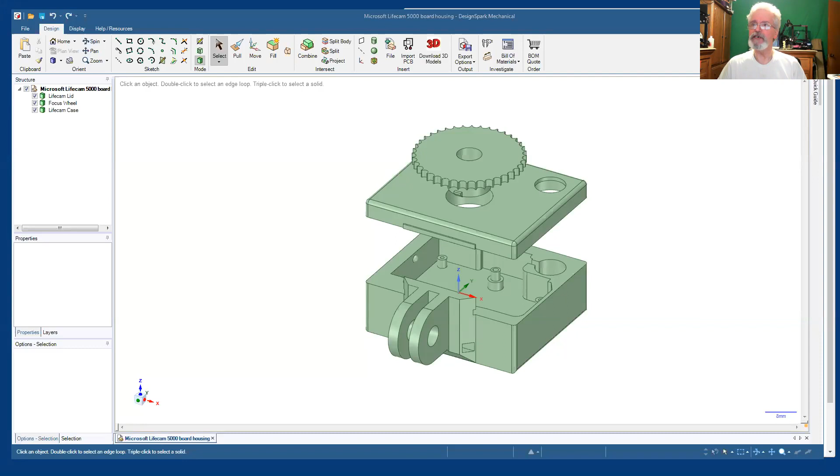So I'm going to share my display, and just for the heck of it, we're going to jump into Google Chrome here for a moment. Let me just move it over here so you can see it. And let's do a search for Microsoft VX-5000. And let's look at images.

So here you can see this is what the camera looks like. And the problem that I had was this mounting, this thing. It's intended to sit on a desk or maybe clip over the top of your display monitor, and it didn't lend itself well for doing what I wanted to do on my desktop with YouTube. So I decided to go ahead and take this case off and get rid of this silly mounting. And so I'm going to stop the share.

So I decided to do that and make a new case for the printed circuit board that's inside the camera, and allow me to be able to mount it on a tripod. And I figured probably the easiest way to go would be a GoPro mount, only because I don't know how to do screw threads in my design software yet. I just haven't figured that out yet.

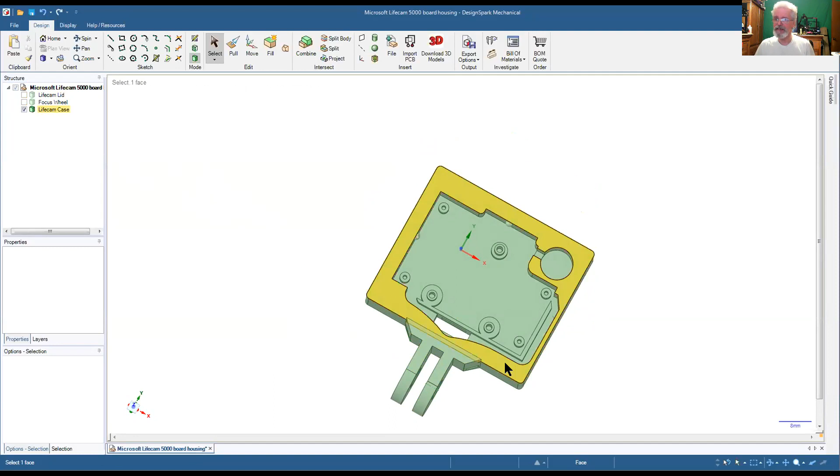So the very first thing I did was I created this case. Now, there were many iterations of this case. I didn't have the GoPro mount on it. I didn't have the channel for the cable that went up the side. I figured out the very first thing was the outline of the printed circuit board and a place to put the microphone, and then the screw holes in the corner to hold the board in place, and then the screw holes to hold the case together.

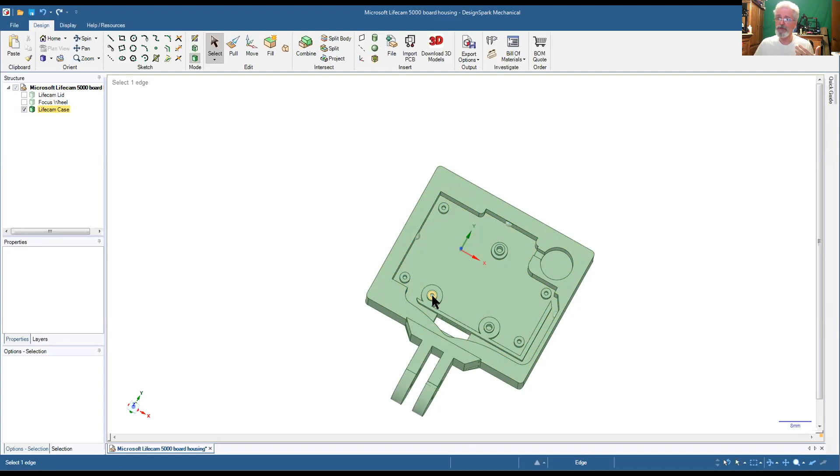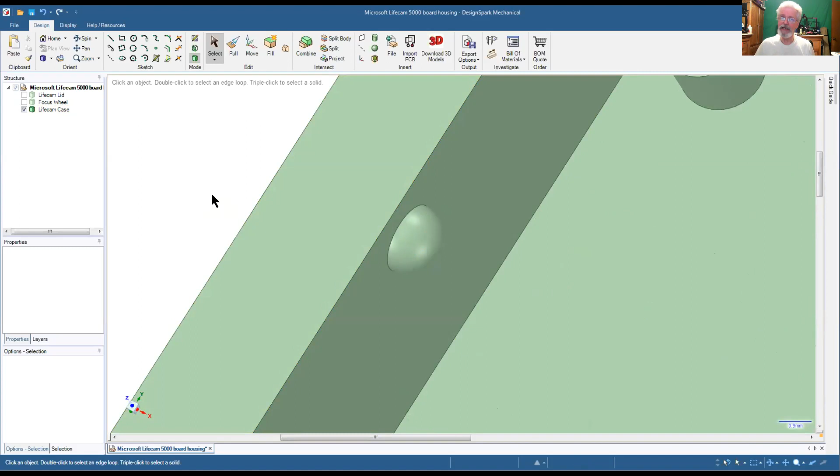Originally, I had planned on having a lid, and I was going to use the original screws to screw the thing together. But ultimately, what I ended up doing was I made these little dimples that poke into little holes on the top of the inside of the lid. So these are just spheres that I created. They're just 2mm spheres, and I embedded them in the side. And then I made a couple of 2mm holes in the top and put those in the places where the spheres would come out. So you just have to sit down and think about how you want to do some things. And so this is the case.

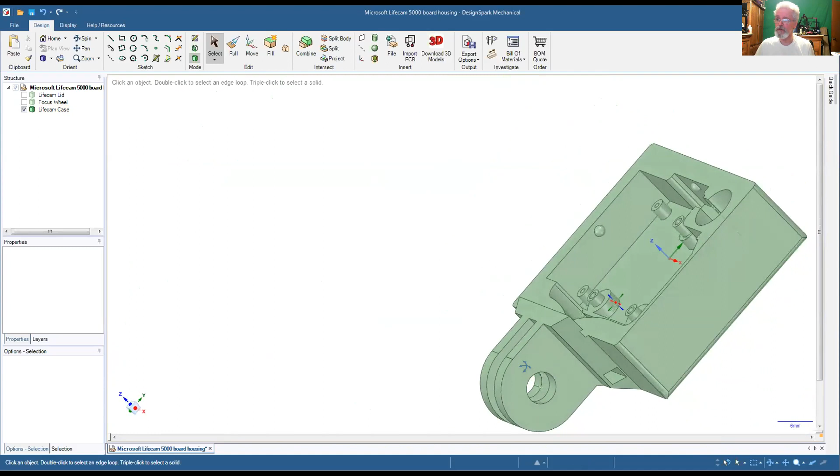And then I found a GoPro image on YouTube, or rather on Google, and I found out what the dimensions are for the GoPro mount. And then I figured, okay, I'll use that on the bottom rather than try to do screw threads and what have you. So this is the bottom of the case. This is where the circuit board sits and everything gets attached to it.

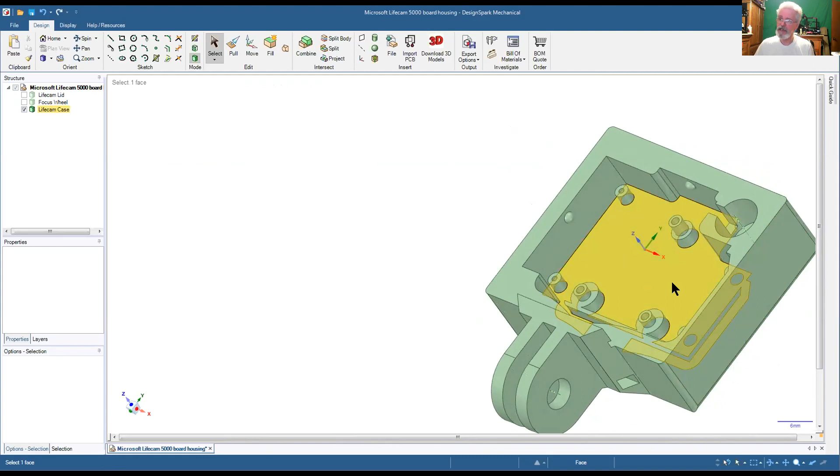All right. And then little things I had to do was like figure out how to get the cable connectors through the back, so I could plug it into the board. And then I put a cable tie hole here so I could anchor the cable to the back of the case. And I made it as nice as I could possibly make it. So now I had to have a lid.

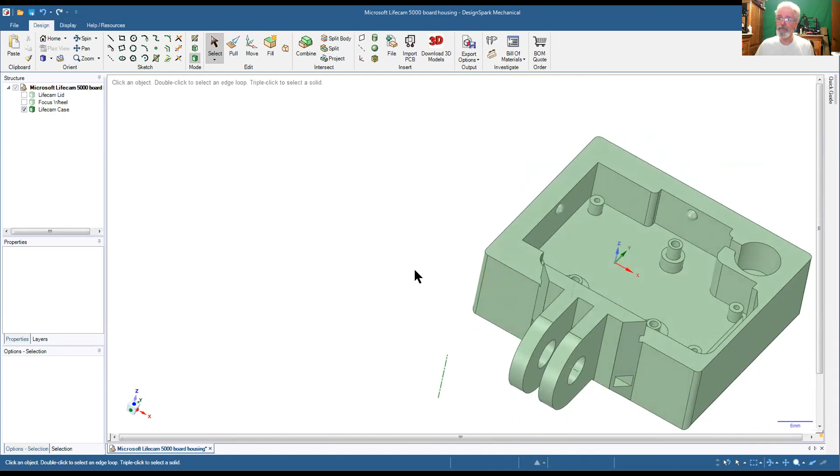So I went ahead and created the lid. The front of the lid is just a flat place, and this was one of the original screw holes I kept. I'm still not using it, but you'll see why. And then, of course, this is the opening for the lens.

Ultimately, I decided to add a focusing wheel because the original camera did not focus, it had a set focus, that was it. But the actual lens mechanism for the camera has a focusing wheel, so I unglued it and decided to fashion a focusing wheel that would manipulate that internal focusing wheel for the lens, so I could use it on my desk and focus at various different distances.

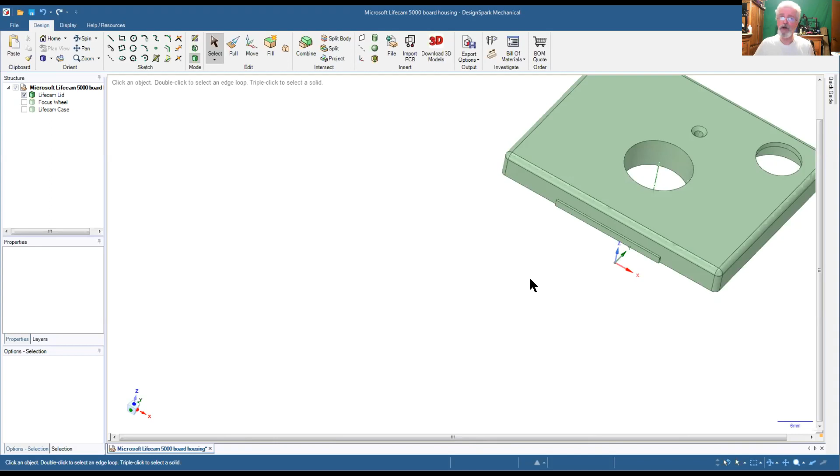And in doing that, I couldn't put screws underneath unless I countersunk them with countersunk screws. So I decided to forego the screws and create these dimples with holes in the side. The advantage is I can now put this thing together without any tools.

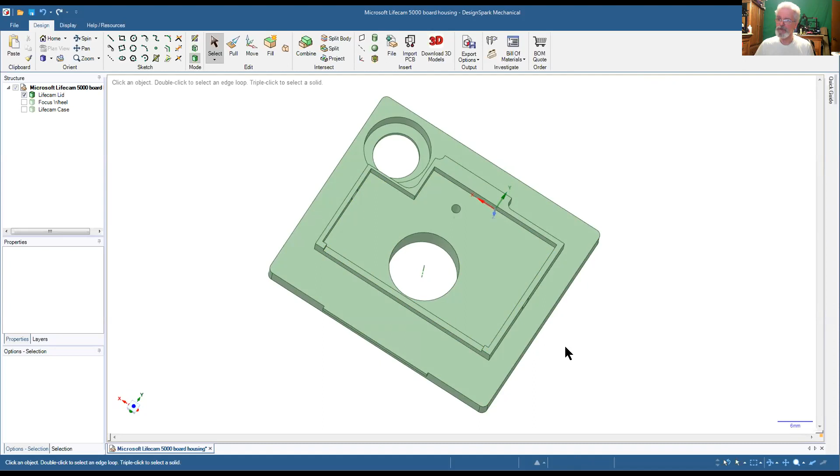So here is the bottom side of the lid. Let me just scoot it over here. You can see here's the place where the top of the microphone comes in, and this is, of course, the lens hole. And then this is the channel, the outline of the board, and a little indentation to allow the cables to fit properly. So this wasn't too bad to design.

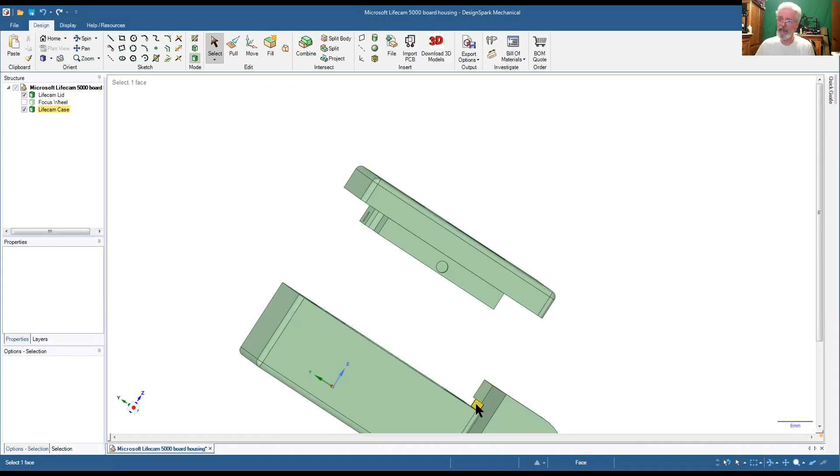It was interesting, I rounded the corners, made it look nice. The other thing I added was this little lip down here that goes into this little channel on the top of the GoPro mount. It helps me keep the bottom of the camera popped in where it needs to be. So you put the bottom part of the lid in, and then you snap it in place with the little dimples in the holes, so there's no tools required.

Okay, so now let me turn these elements off and turn the focus wheel on, because the focus wheel was interesting. I had to figure out how to create patterns in DesignSpark. That was not an easy process because there's very little information about creating patterns, and that's a little confusing. But I created enough patterns to make these little knurled things around the focus wheel to give you a little bit of grip.

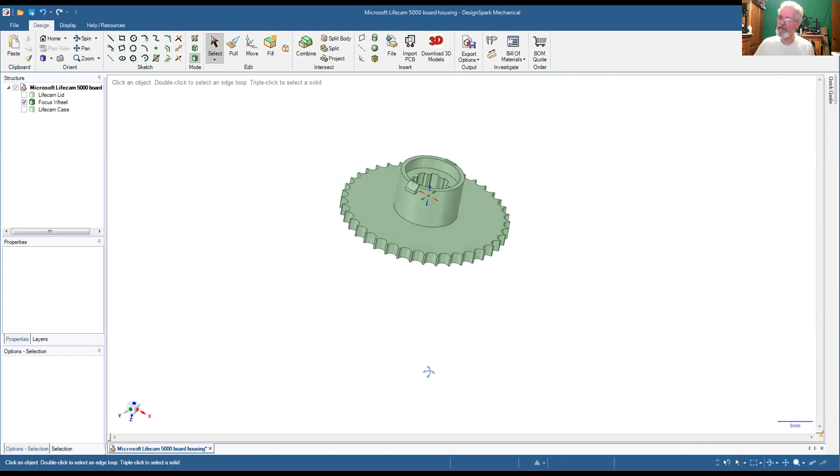And then, of course, we have the center hole for the lens, and then we have to have these little teeth that go into the internal focus mechanism to turn that gear. So I created that, and that was interesting.

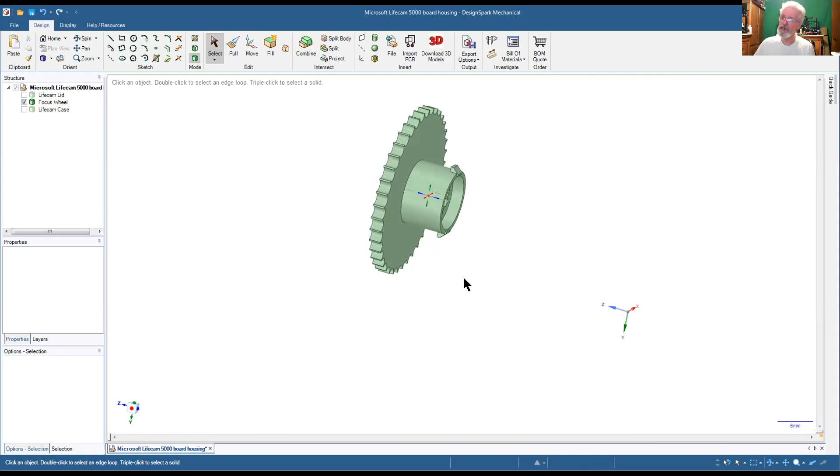And then I had to figure out a way to keep the focus wheel in to the camera without it popping out. So I created these two little ears that just kind of go into the edge, they push into the edge of the lens opening on the front of the case. It's a very tight fit, but you push it through and it's fine. That keeps the focus wheel attached to the front of the camera, and everything fits very well. So that's how the process finally came out.

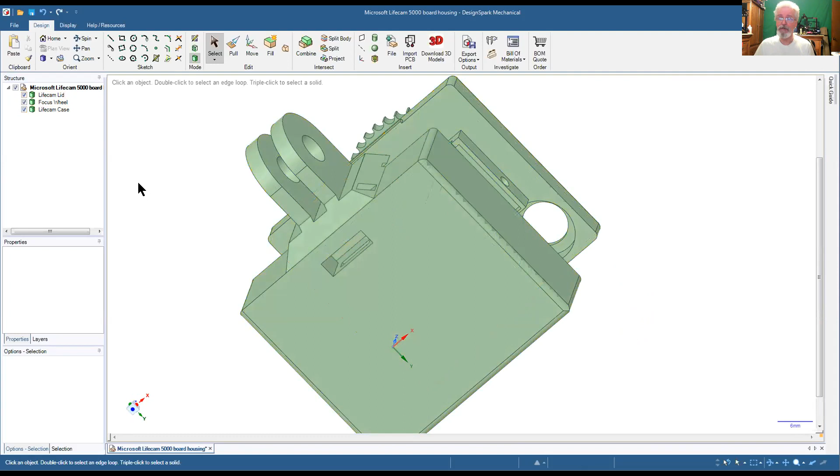This is the entire camera case in an exploded view, so you can see what's going on. Let me just jump that up a little bit and hit the home key.

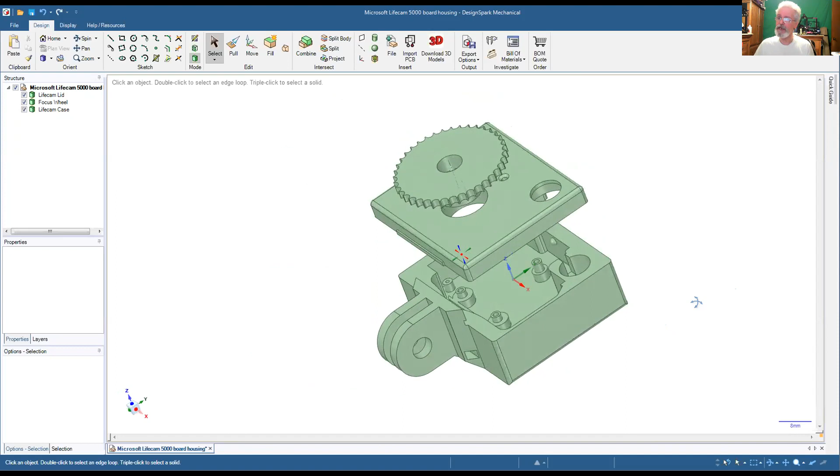And so it was a fun project. I got to learn a lot about 3D design and the iterative design process, and of course, DesignSpark Mechanical. DesignSpark is very easy to use, I think it's easier to use than Fusion 360. But the nice thing about it is it doesn't require a broadband connection.

So I'll just leave that there. It's been a fun project, and the camera's working. You'll see it in videos here on my channel.